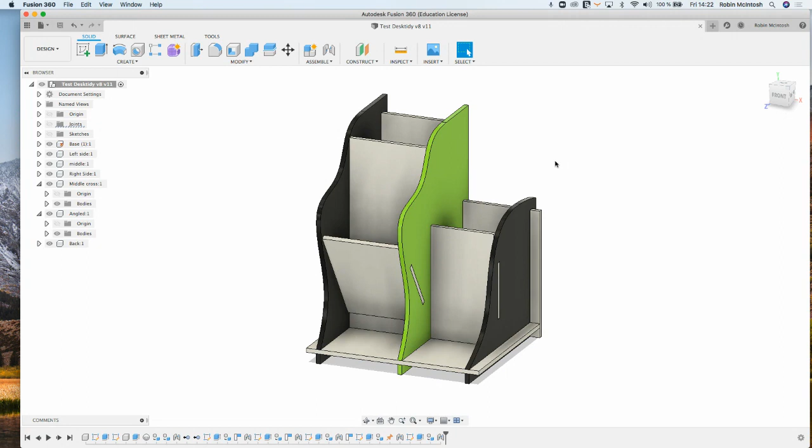This video will take you through taking your parts from Fusion 360 and getting them ready to take into CorelDRAW. At the point of making this video, there was some problem between the two packages where curves like this one wouldn't show in CorelDRAW. So this is a workaround.

First we're going to go over here to the base. We're going to work our way down through these parts. We click on the base and hit create drawing. The first time we do this, we've got component 1 selected, and we're going to do a new drawing from scratch.

We need all of these parts to sit side by side on the paper, so I'm going to make the page much bigger than A3 and go with A1. It's probably too big, but better too big than too small. So we click on A1 and then OK.

It's going to set out that one piece and take it into the drawing environment. You can see that new tab that's opened, with all these different toolbars along the top. It will take a couple of minutes the first time you do it, but this is my third shot at doing this video today, so mine's working a lot quicker.

So you see this view that comes in. We're going to change the orientation of that, because this view is the end-on view of the base, and there's no useful information there for the laser cutter. So we need to change that orientation to top, and bring it back over — that's a good view to have.

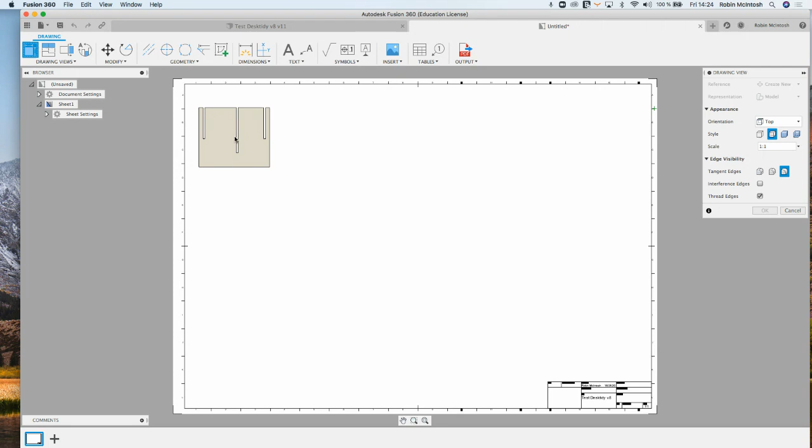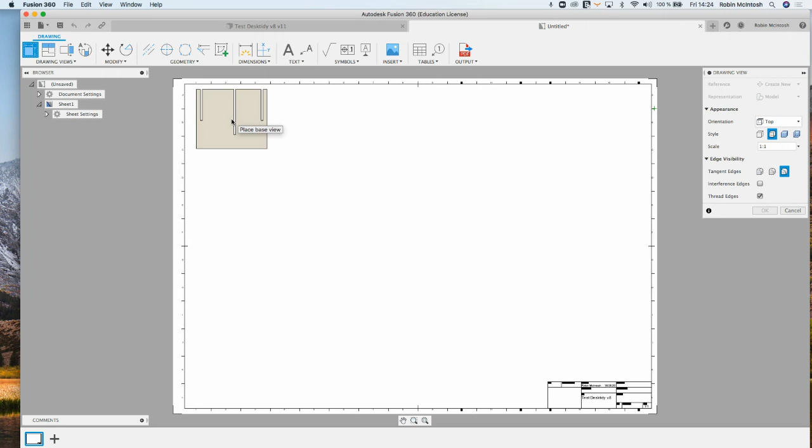What you do need to check is that the scale remains 1:1. If it's not 1:1, your part will be too big or too small — if it's 2:1, it'll be too big, and if it's 1:2, it'll be too small. So I'm just going to place that somewhere on the page, and then hit OK.

Because of the curve problem, we can't create DXFs. But we can create a PDF and bring that into CorelDRAW, and it's good that the size remains the same, so our drawings will still be able to be laser cut.

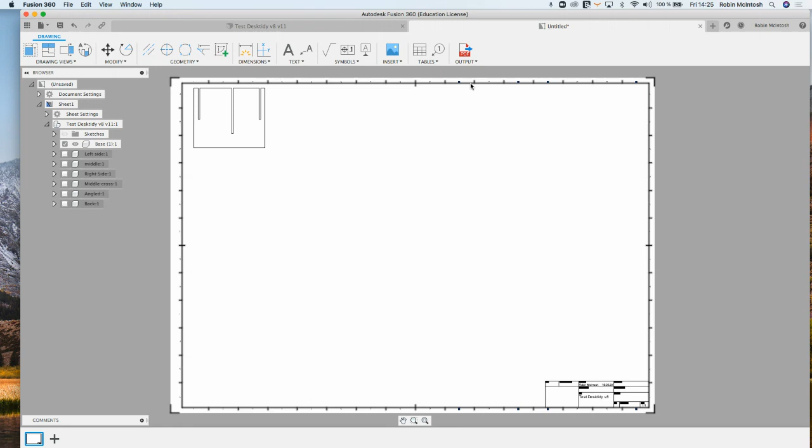So what we don't need is this border around the outside, so I'm just going to click on that border and delete it, and we don't need the table either, so I'm going to delete that too.

Now we've got our parts there. It's very important that we save this with something sensible, so I'm going to save this as a PDF for CorelDRAW, and then hit save.

And now we go back to our design, and we're going to work our way down through it. So we've done the base — next, we're going to do the left side.

I'm going to create a drawing, so I secondary click on the left side and scroll down to select create drawing. This is the same as we did it the first time, but we've got to change a couple of things here.

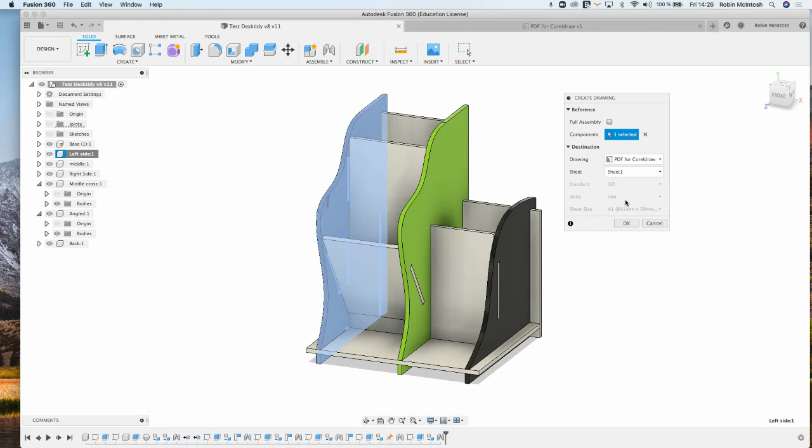We've got to change it from drawing create new to drawing as the PDF for CorelDRAW — that's the tab we made up earlier. We don't want it to make a new sheet because we want them all on one sheet, so we change it to sheet 1, and you'll notice it's changed to A1. We can't change that because the sheet has already been made. So we click OK.

And we see here again that's no use for us — that's the front view of the part, so we need to see it from either the left or the right.

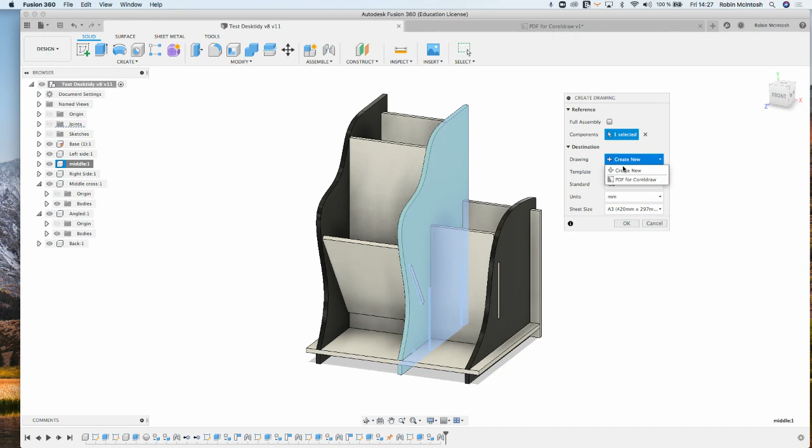So we're going to change it to left, click, then hit OK, making sure again it's on scale 1:1. Now this does get a bit repetitive. You need to do it all the way down through all these parts. Secondary click, create drawing, change it to PDF, change it to sheet 1, click OK, change it from the front to the left, make sure it's on scale 1:1, click OK.

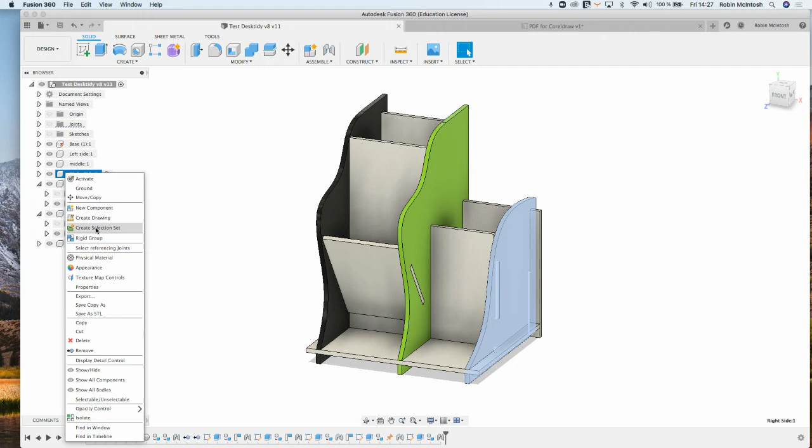Back to the desk tidy, and we need to do the right side now. Create drawing, PDF for CorelDRAW, sheet 1, OK, and then right or left, doesn't matter, should be exactly the same. Click OK.

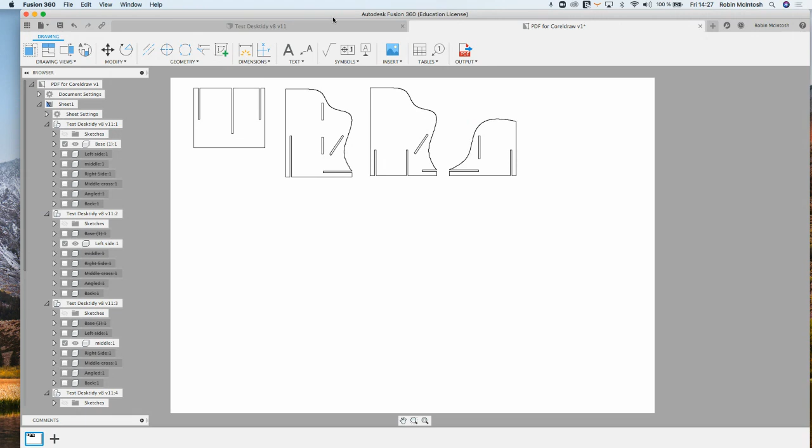Then we did the right side, we're going to do the middle cross. Create drawing, PDF, sheet 1, OK. Now this time we don't need to change the view because the front is the correct view for that part.

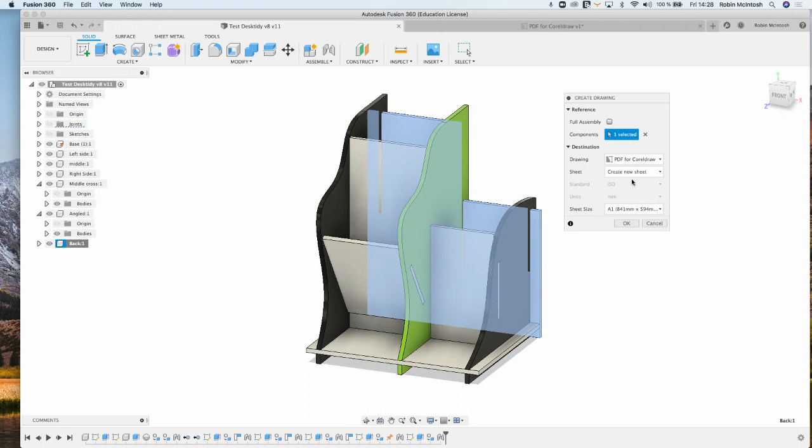And then this is where I'm going to go a bit out of order, because the angled one causes problems - we're going to come back to that. I'm just going to bring in the back first. So secondary click, create drawing, PDF for CorelDRAW, sheet 1, OK. Place that in, making sure it's scale 1 to 1, remember.

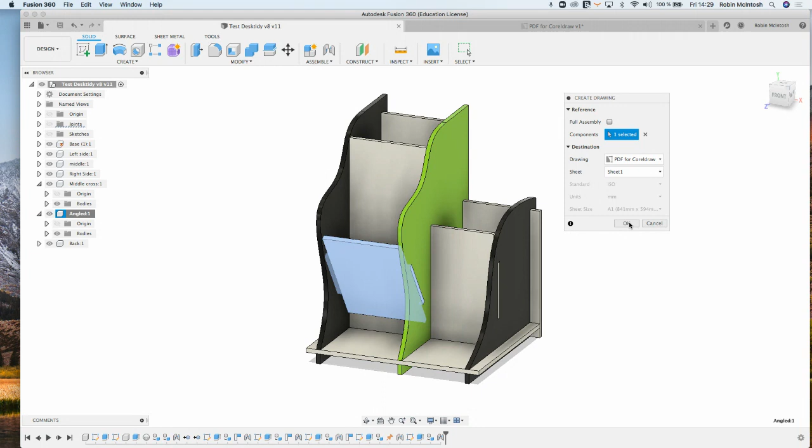Okay, now this is where we have a slight issue. So if I bring in the angled one, create drawing, and PDF for CorelDRAW, sheet 1, OK. And see, when we bring that in, for some reason it's changed it to scale 2 to 1. But this is useful that it's changed the size. I'm just going to accept that just now and show you why there's a problem with this viewpoint.

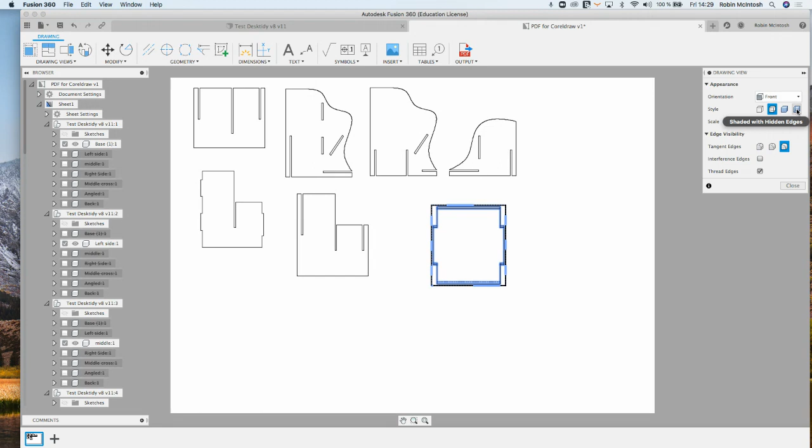Can you see those second lines on the top and all around it? That's because it's looking at the angled part straight on. This part is not that size. Even if I change it to be 1 to 1, the problem is it's at an angle. It's not the right size for in there. It's not what we call the true shape.

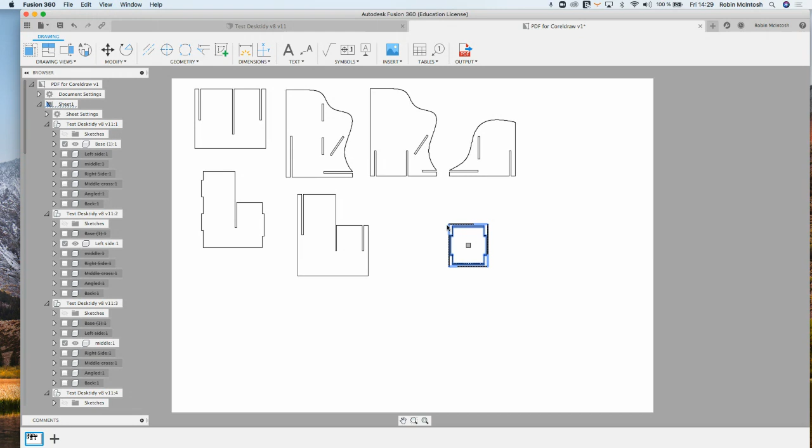Now, I'm sure that Fusion 360 will come up with a solution to this problem, but we've got a little workaround that we can do. So I'm just going to delete that one.

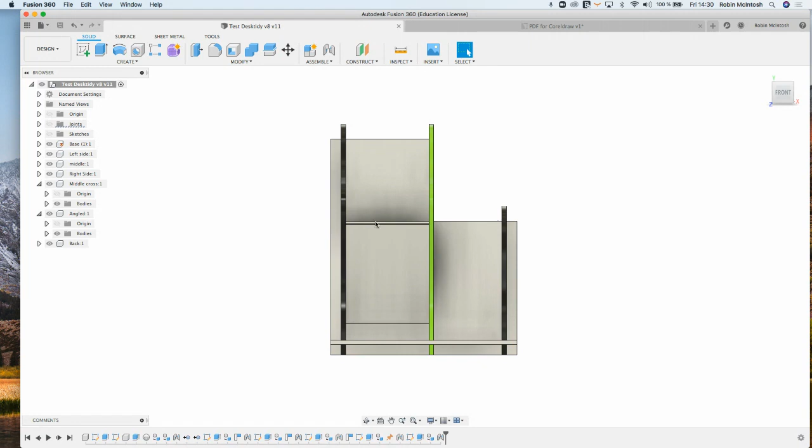Now, the orientation when we brought them in was all relative to these views on the cube. Remember, it was the front that we were always bringing in. That's why we were seeing the sides as that rectangle and the base as that rectangle there, and so on. And you can see here that angle bit, we're seeing the top of that. The actual true shape of that angled piece is only visible when you bring it round to that viewpoint there. Now, I don't know what angle that is, and it doesn't really matter.

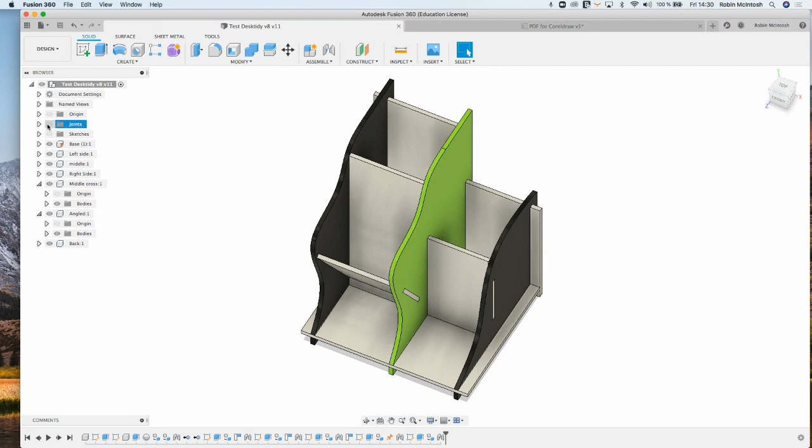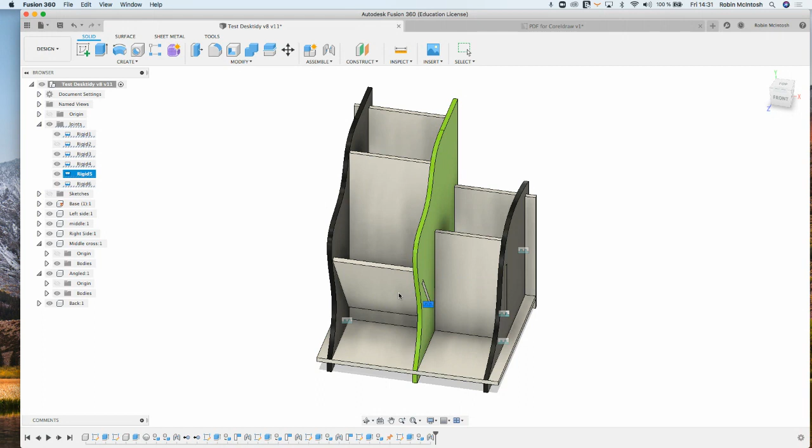This is where we need to make sure that we've got all our joints easily identifiable, if you like. So I'm going to turn on my joints in the browser here, and you can see now there's only one joint that is touching this angled piece, and it's this one here. Okay, so let's scroll down - that's called rigid 5. So what I'm going to do is I'm just going to click on that, and I am just going to delete that joint. Now, when I delete the joint, that bit comes back to being clear on the top view.

So now I'm just going to secondary click on the angled piece. I'm going to create the drawing. I'm going to make sure we put it into PDF for Corel, into sheet 1. Click OK.

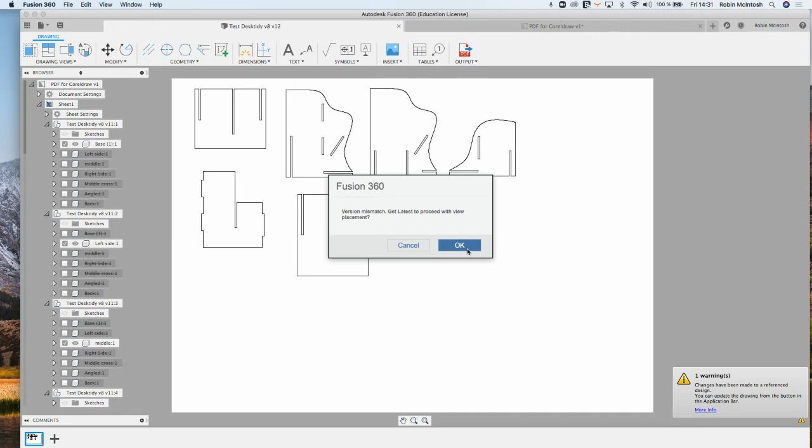There's a version mismatch - get the latest. Okay, so it's telling me there's an issue with it because I've moved it. So I'm going to go back now. Oh, not - I'm going to go back here now. And I'm assuming that this is just because I've changed and deleted the joint, saying there's something wrong with what you've done. So I'm going to go.

Sorry, clicking back, I thought I had an error message there. I may well have, but we're going to work this out. Let's not panic. So that part there, the angled part, I'm going to do that process again.

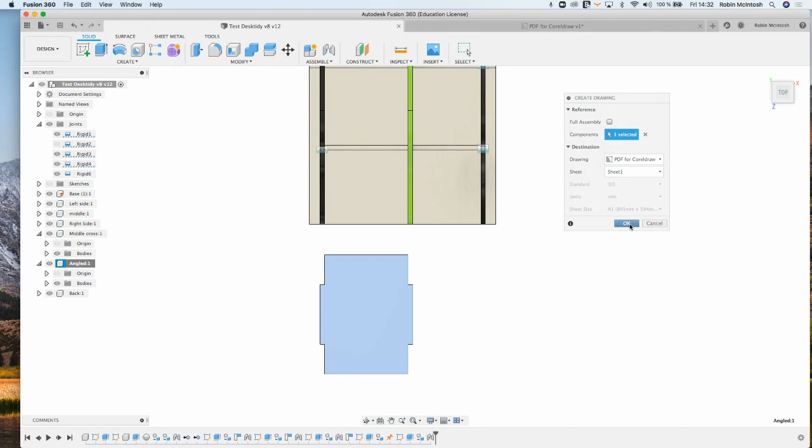Create drawing, making sure it's PDF for CorelDRAW, into sheet 1, click OK. Come back to here, and now for some reason, because I changed it, it's put it on 2 to 1. I think it's just thinking you want that larger on that screen.

Now, from the cube that I was showing you a second ago, we know that the front view is no use. We need to go up to the top view. And I can place that in there, hit OK. Now everything there is good.

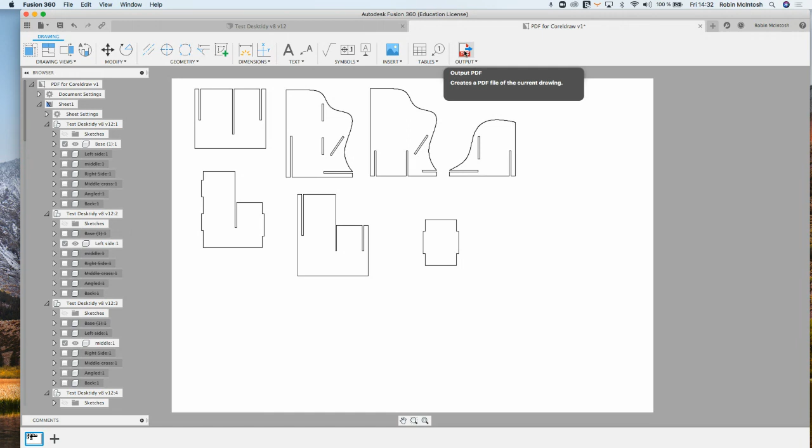What I'm going to do now is output that. So click on the output as a PDF, and we can just accept that. We only need the current sheet, and hit OK. You don't actually need to change it to current sheet.

So PDF for Corel, that's a useful name for that. I'm just going to hit save. That's going onto my desktop, but you put it wherever you save it. And that's good to go.

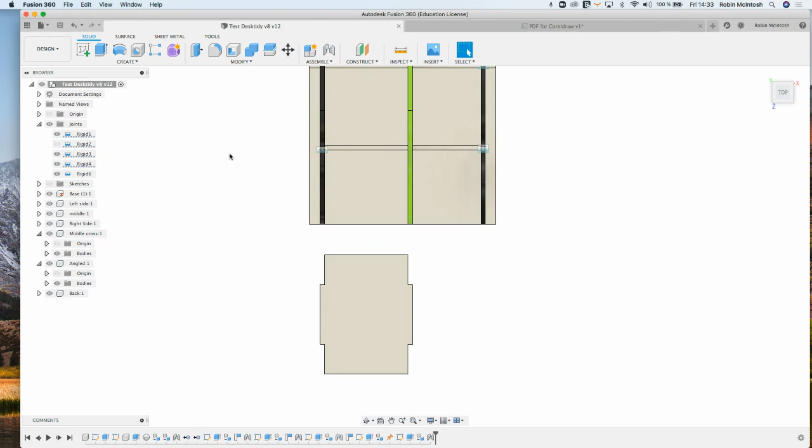One thing I would suggest is that you go back to your drawing and just undo the deleting of that joint, okay? Because you want to keep your assembly nice and neat.

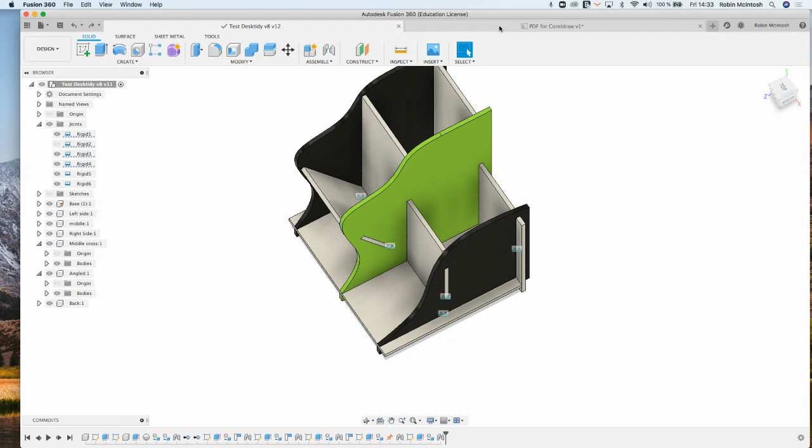It's very important that you do save your PDF before you do that, because if I hit save now on this, it should probably update that. You see you get a mismatch here.

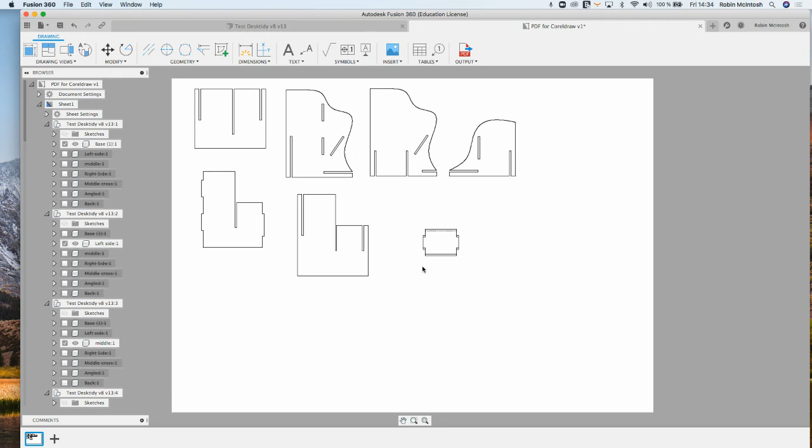I click on that. If I click up here rather, sorry, it will update this to show you the wrong size, okay? So that hopefully highlights why we need to do that little workaround to get the actual size for that part. Otherwise, we've got all these extra useless lines.

Anyway, that's how we create all those drawings. So we've now made that into a PDF. I'm just going to minimize that and minimize my web page behind. I'm going to bring in CorelDRAW.

And I'm going to bring in, with a secondary click, and I'm going to place. So you get this dialog box. Now I put my stuff onto my desktop, and I'm going to bring in my PDF for CorelDRAW. I'm going to hit place.

Now when it brings this in, we want to keep everything as curves, import comments in places. Yep, definitely don't hit crop contents to drawing page, otherwise you will resize everything. Just hit OK. And now you just click once on the screen. All of these parts should be the same size.

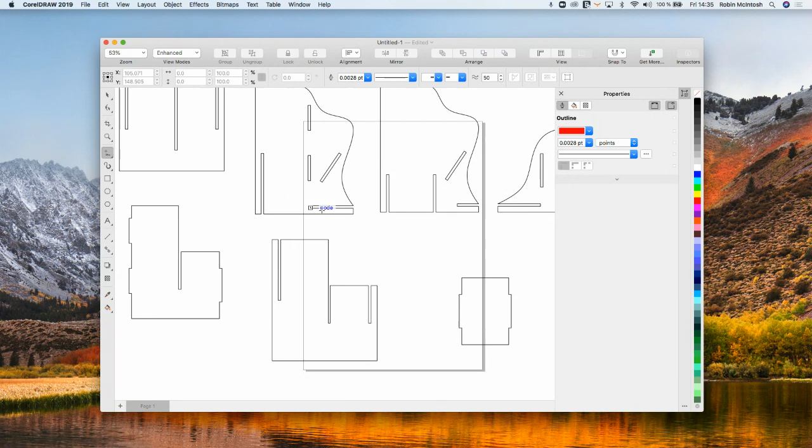We can just check, so I'm going to zoom right in here. On that part there to there, it should be 3. It's probably going to tell us that it's just under, probably because I didn't get right on the lines. Okay, so I'm just going to delete that line because we do not want extra lines.

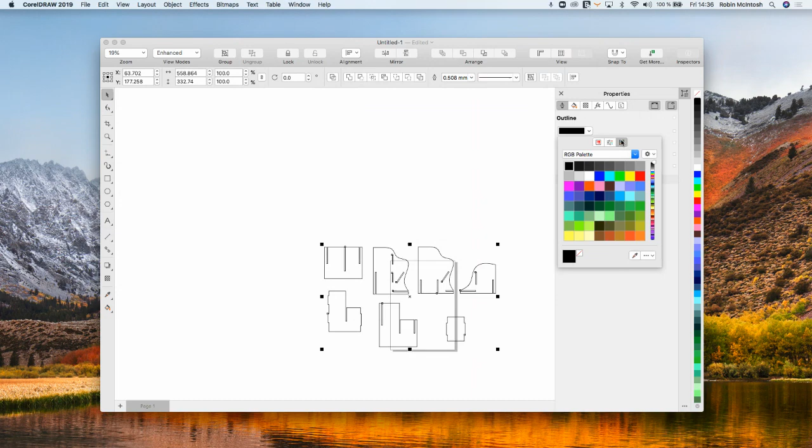So now we would select all of this and change it to millimeters. It needs to be in red, 0.001. And that should be ready for saving to be laser cut.

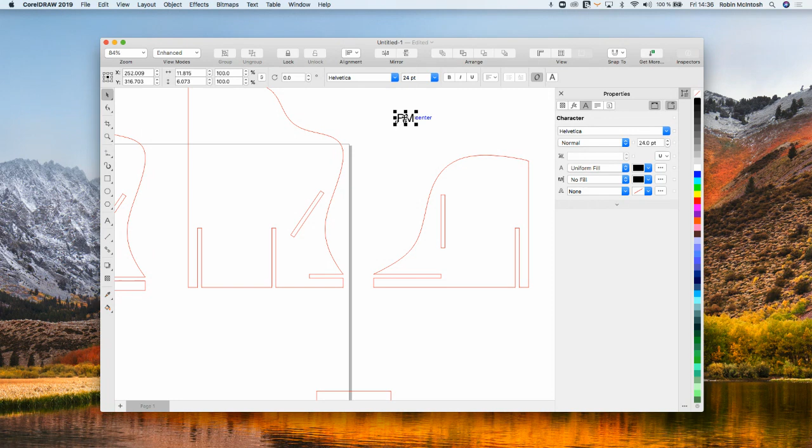Of course, we would want to put our initials on here. So just click on the letter there, the A. Just click anywhere, don't drag a box, but just put your initials on. And then what you can do is drag that into some discreet place on each part. Command C, Command V will copy that, and you can take a copy and put it on each of your parts.